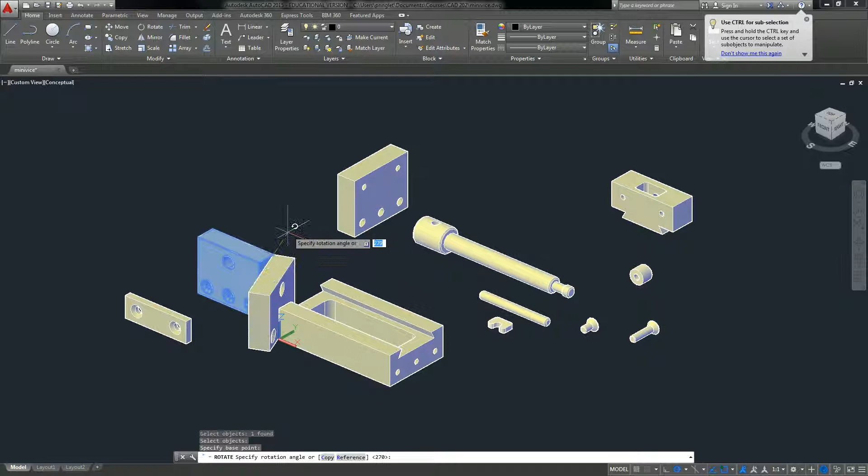First I'm going to rotate the pieces that need to be rotated. I know this is going on the back side, so I want that in that orientation. This object here needs to be rotated into this orientation. I can move this from this endpoint to this endpoint, and move this from this endpoint to this endpoint while I have them rotated. Now I've got those couple of pieces lined up.

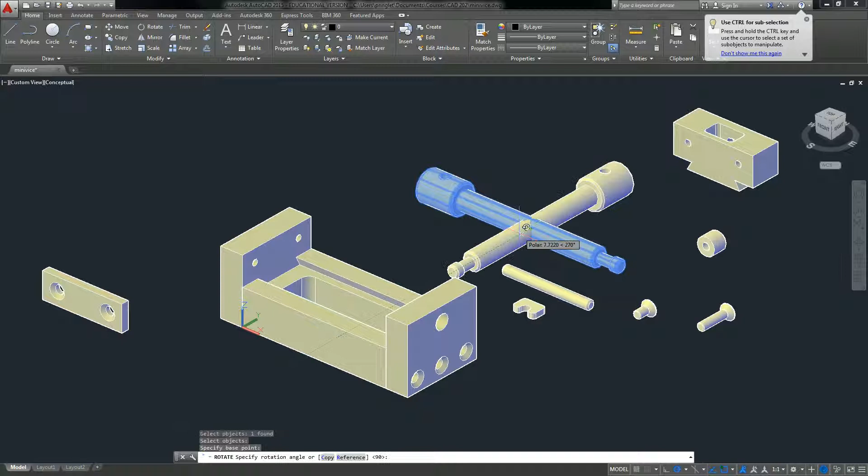I need to rotate this 180 degrees, so I'm just going to rotate that 180, and then move it from its geometric center point to the center point of this circle right here. That's going to locate it for me so I don't have to worry about putting it anywhere else.

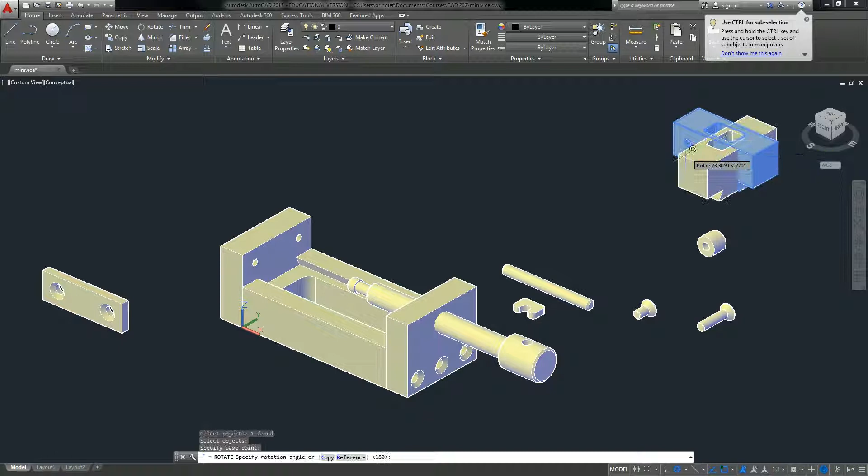Next I'm going to rotate this piece, only 90 degrees, and move it from the center point right here to the center point right here, and that's going to locate that. If I orbit this slightly I can see that's in the correct place.

Now I've got a couple of things to do where I've got multiples of some different pieces. First I'm going to rotate this piece here 90 degrees so it fits in with what I need, but then I'm going to mirror it so I have two facing the opposite direction.

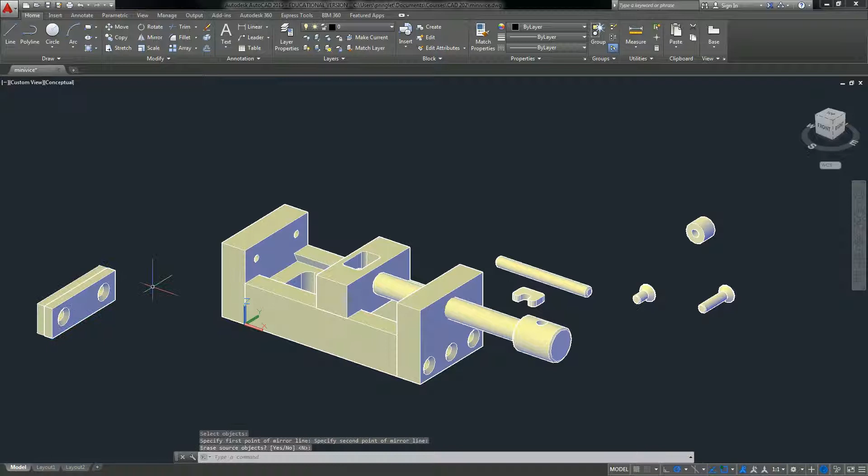Now I can move this one from this endpoint up to this endpoint, and I see I missed that endpoint, so I want to make sure I move it appropriately from there to there. It looks like I may be off on this one too, so let me zoom in and verify that's in the correct location.

One thing you don't want to do ever is start unioning any of these pieces together, because they are separate pieces. Now I've got all of those pieces in.

I'm going to need to rotate this thing first 90 degrees, and then go to a UCS front, and while I'm in here rotate this 90 degrees. Let me undo that so I know where it's going. So rotate that 90 degrees. I'm going to rotate this up 90 degrees. Okay, now that stuff there is in the proper orientation.

I'm going to move this from its geometric center point to the center over here, and it doesn't look like I'll be able to get a center over here. So I'm going to move it from its center point to the center point here. Looking at the dimensions, I can see it's 12.5 in, so now I'm going to move it an additional 12.5 to locate that in the correct place.

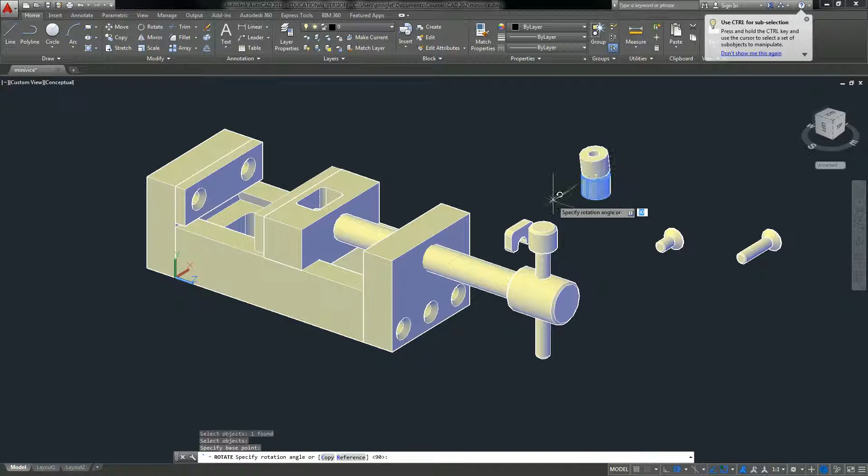We're going to rotate this one here 180 degrees and then move it from its internal center point to the bottommost center point on here. As you can see, I've got a lot of the stuff assembled already just by doing some simple rotation.

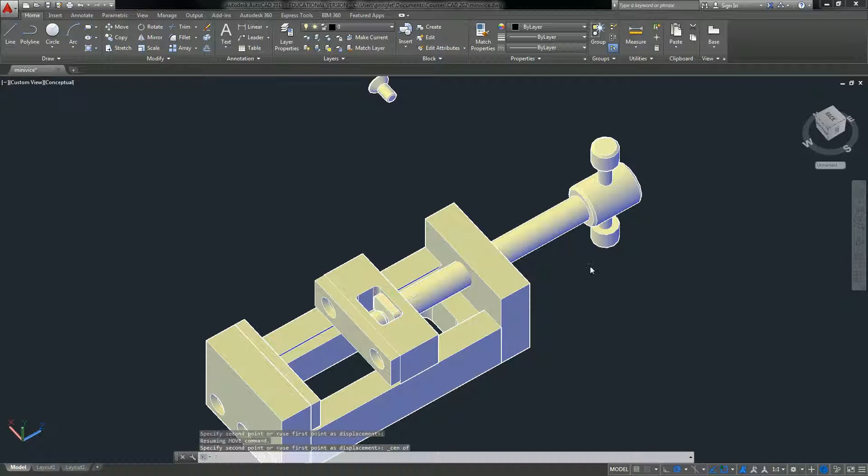Now I want to move this piece from its center point over here, and I'm going to have to orbit around to get the center point of this located in its correct location. Now the only thing I have left are the screws, so I'm going to go back to a world UCS because these things are going to be rotated along that direction. I'm going to start by first rotating this one.

Once I get it rotated, I'm going to move it onto my screen a little bit, and here I'll use a bit of a shortcut. Looking at the dimensions, these things are 19.5 apart. So I'm going to copy this over 19.5, and then copy the other one over 19.5 as well. So what I have is 3 screws that should be 19.5 millimeters apart.

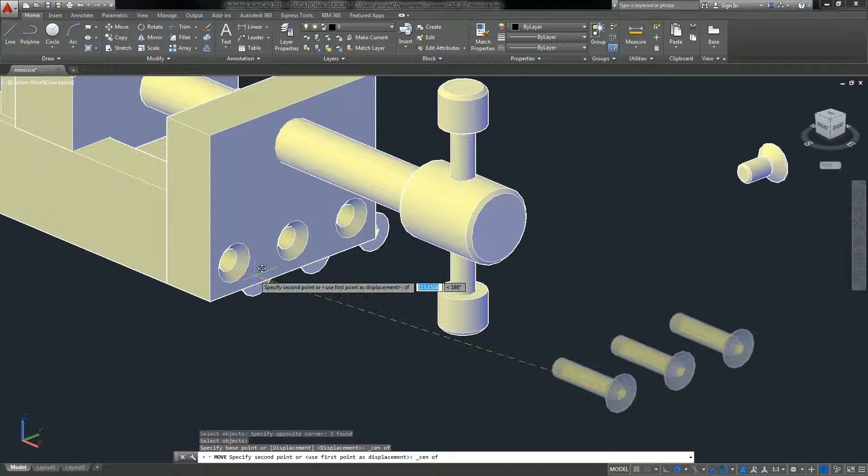Now I'm going to move them from the outermost center point here to the center point of the countersink. But instead of just grabbing one like I did there, I'm going to grab all 3 and just move them as a unit so they go into place.

There's a couple of different ways I could do this next step, and the way I'm going to do it is mirror this, this, and this around the midpoint of the whole thing. That should give me the 3 screws on the opposite side as well.

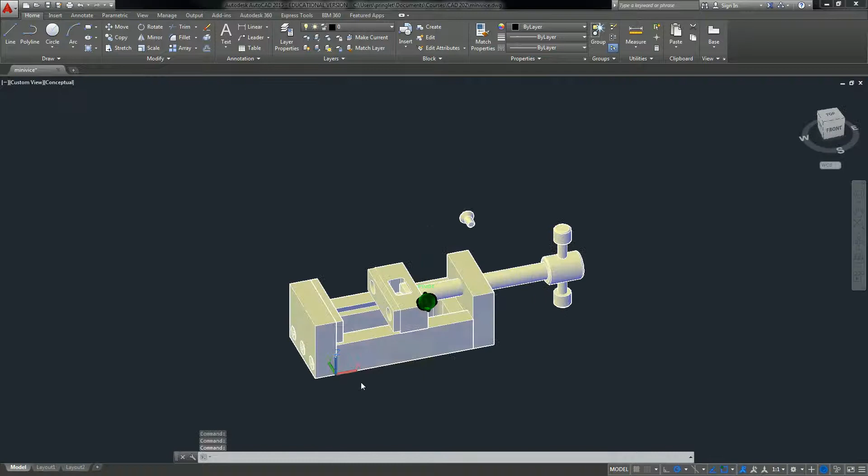Now I've got this screw, which is the only thing left to place, so I'm going to rotate this 90 degrees, and then looking at the drawing, these things are 35 apart, so I'm going to copy this over 35.

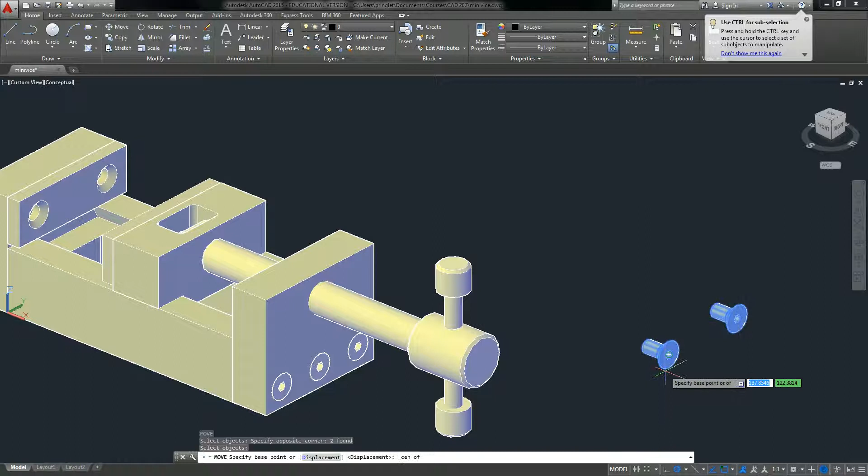And then I'm going to move these 2 from the center point of the outside to the center point of the countersink. Then I'm going to copy them over to here.

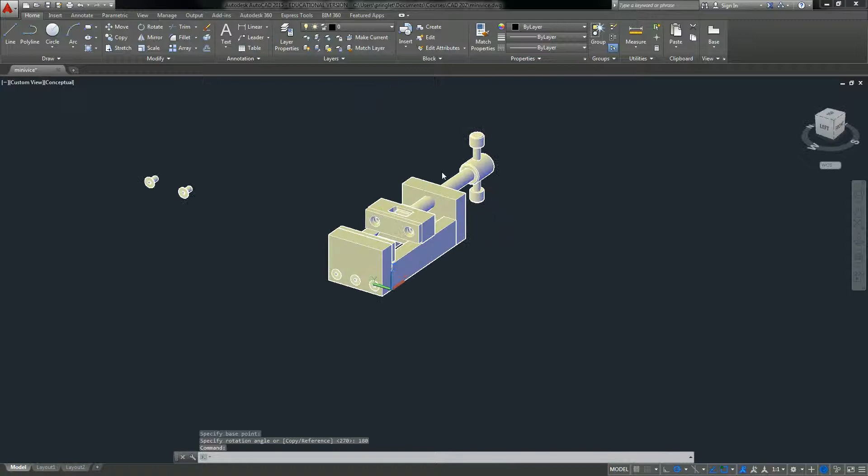Now everything I do from this moment, I want to do both of them at the same time. So the rotating of 180 degrees, as soon as I figure out where they went, I can go ahead and move those again from the outside center point here to the center point here.

So what I have now is everything in all the views that I need, and everything looks to be the way it's supposed to be. I do want to turn off perspective just because that can get a little confusing. And here you can see I've got the assembly model.

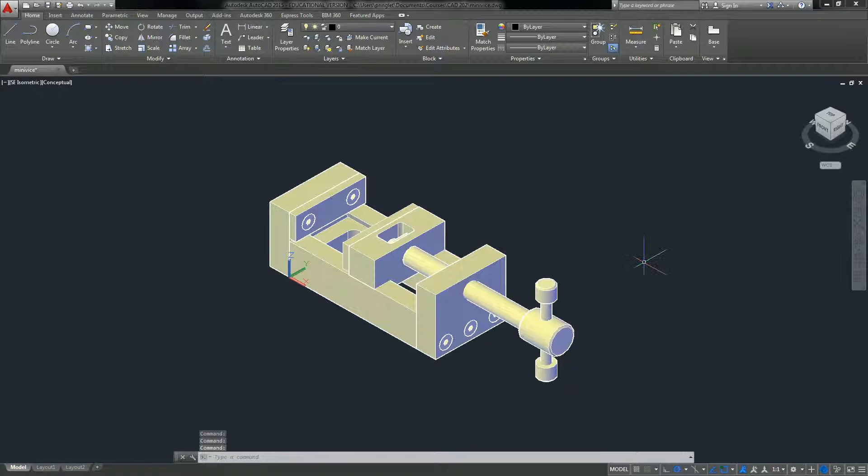Now, in addition to the assembly model, I've got to create a drawing of this assembly. So if I just go to base view from model space and select everything and hit enter, it's going to ask if I want to use an existing layout. I'm actually going to call this ASSY DWG, that way I know the tab I'm creating is my assembly drawing tab.

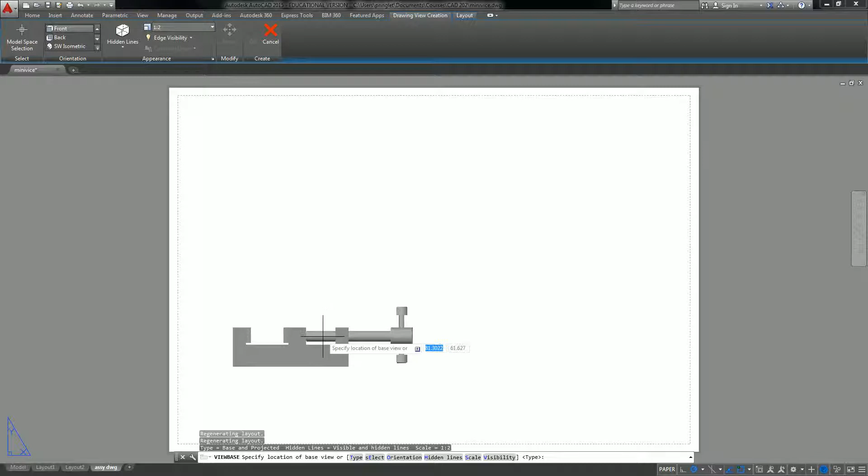Once I get it over here, I can place my front view, my top view, my right side view, and my isometric view, and hit enter. Now at this point I can go in and place the dimensions that are pertinent, like the overall length. The overall length from here to here is irrelevant because it does change, so you could put in there what the maximum is and stuff like that, but this satisfies the assembly model with some basic dimensioning.

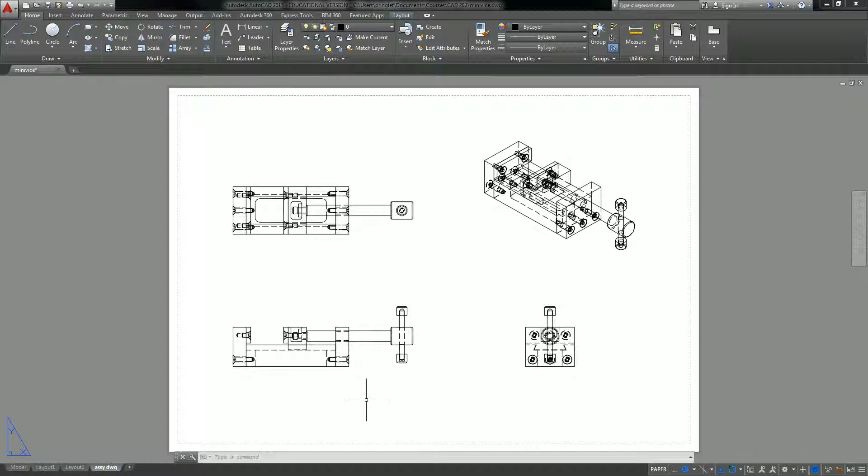And turn this to shaded with visible lines. That way it looks a little bit better. With some basic dimensioning, we can get this into being an actual assembly drawing. So we've got the assembly model, and for the assembly drawing, again, you may want to just add a couple of dimensions.

This thing right here, that's 130. Its overall height is 45. You may want to put in the distance between here and here, which is another 145. And then you can add other dimensions in here so that we can estimate how long this thing would actually be if it was fully extended or if it was brought in fully.

So if I were to give this an overall dimension now, from here to here, I would see that it's 202. But I also know that I can shrink that in by another 37, and that it can be expanded out by another 33. So it could be the 202 plus the 33 or minus the 37. In doing that, it gives me a good indication of how big this thing actually is.

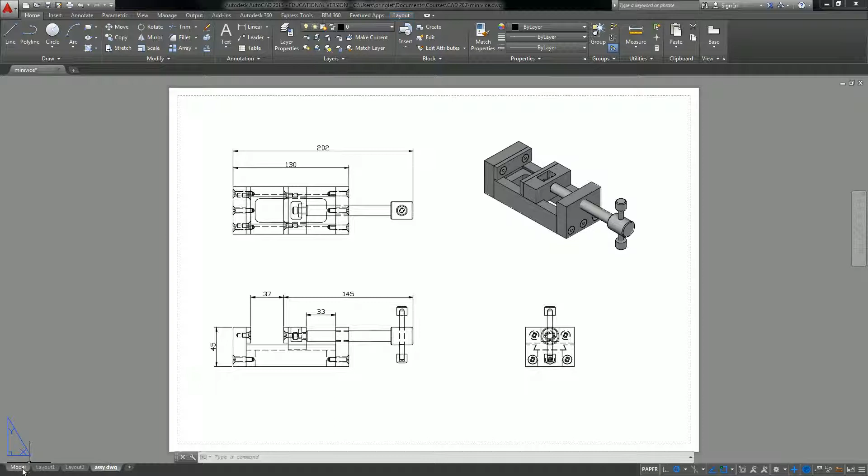So now, going back to detail views for each non-standard piece, if I go back to the model, I can go right back to base view from model space, and rather than selecting everything, let's say all I want to do is this piece right here, which is going to be my end plate. I can say enter, and for my layout name, I'm going to make end plate.

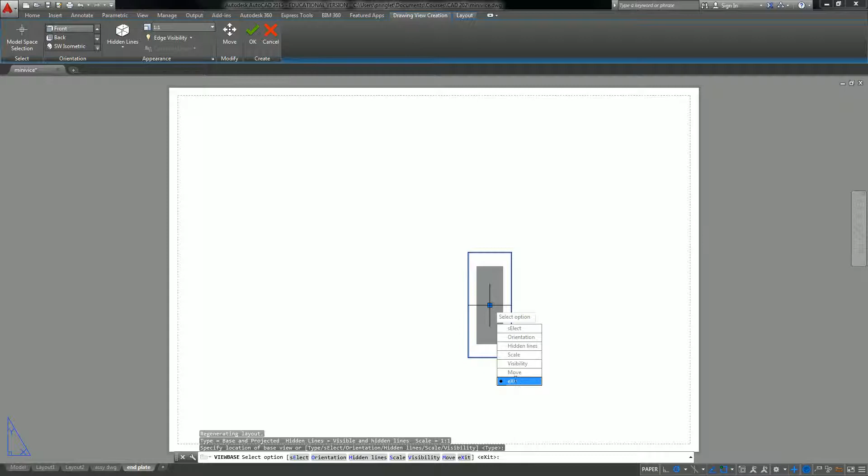Keeping in mind this is in the assembly view, everything is not going to look exactly the way you want. In fact, this is showing me the front view as the right side view because of the way it's oriented in the model. I'm okay with that. All I have to do is locate this, hit enter, and there I've got those two views.

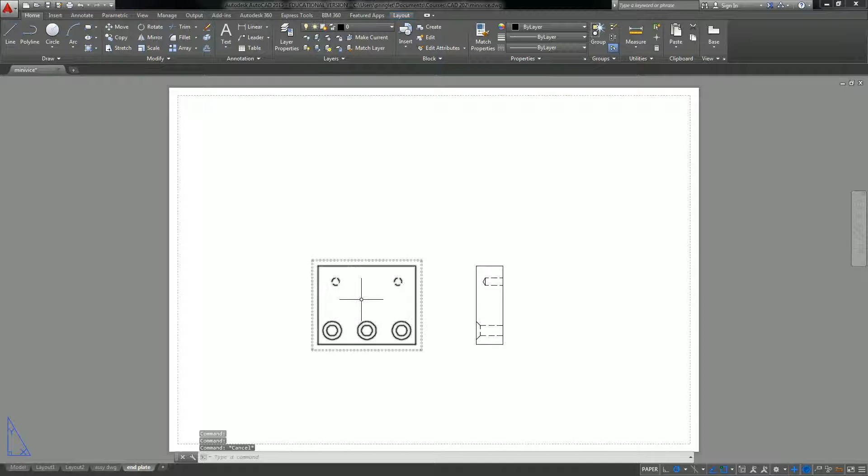Now, under base, I can come in here and create another view if I want. In this particular instance, these are really the only two views that I need, so I'm just going to go with these two. If I hit the drop down, I can change the scale. I may want to make this a little bigger, but I'll leave it from parent. I do want to click on this and do a projected view to show the isometric, just for consistency.

If I want, I can move these views so that I have a little bit more room on the screen.

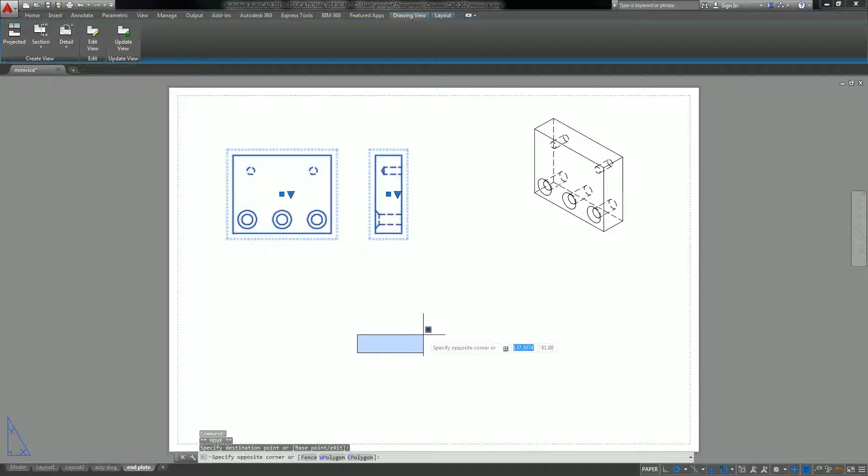At this point, I can add other pieces to this. I know I'm on the end plate, but I can come in here to base and say from model space—let me just go back to model because it's easier—and do base view. From model space, I may want to do the movable jaw as well. So I can hit enter, and if I hit down, it shows me the layout name I can use, and in this case I want to use end plate.

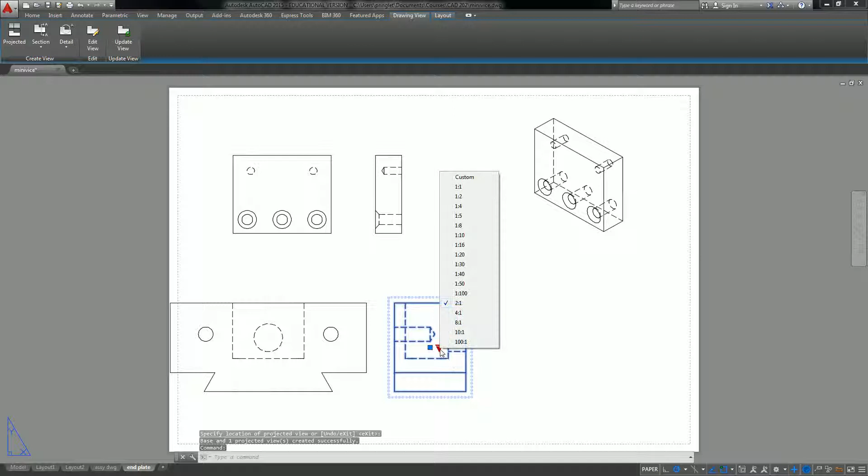Again, this is going to be in the right side view, so I want to click here, exit, and then bring this over. Now this is probably a little bigger than I would want, so I'm going to change the scale. Instead of being 2:1, I'm going to go to 1:1. That way I've got everything that I need. I can now relocate this so that I still have plenty of room on my sheet.

Now I want to come to this view and do a projected view from it to show the top view, and just for consistency, again with the isometric. I can now go in and begin detailing out all of these views.

The dimensions you're going to want to place are pretty much linked to the dimensions in the book. So it's a lot easier to get the information you need if you match up the dimensions in the book with the dimensions we have on the objects. Then you can pretty quickly go through and get all the dimensions you need. So that is going to be the detail views of the non-standard pieces.

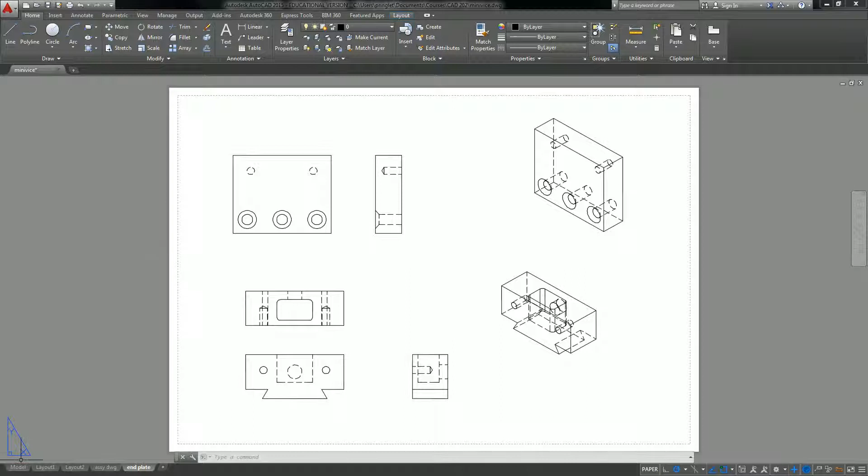The non-standard pieces in this particular exercise are everything but the nuts and bolts. The bolt that goes through here, the 6 of these and the 4 of these, those are the only standard parts. So those ones are not going to have to be modeled like the rest of them. The last thing we have is the exploded view, and this is going to be probably the trickier of the things you're going to do.

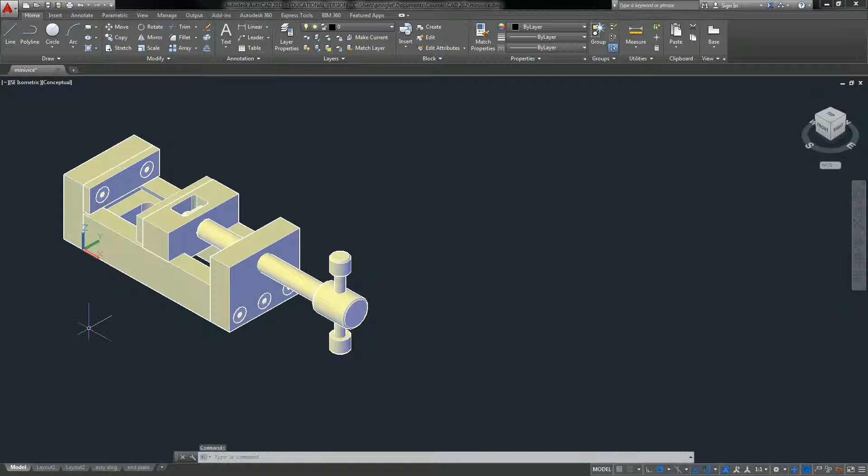The easiest way to start that is to first copy everything that you have over to the side. By copying this over to the side, you ensure that you're not damaging your assembly view at all.

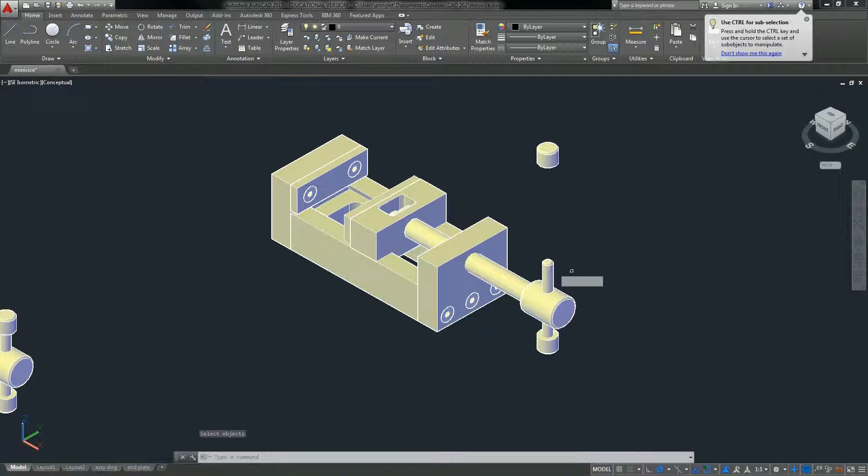Now at this point, I'm just going to move things based on the axis they were assembled under. So we'll move this up, and that shows the explosion of those pieces. Now I can take and move this retainer up, and then I can move all of this straight back so that it's out of my part. I can then take and move these three objects straight out.

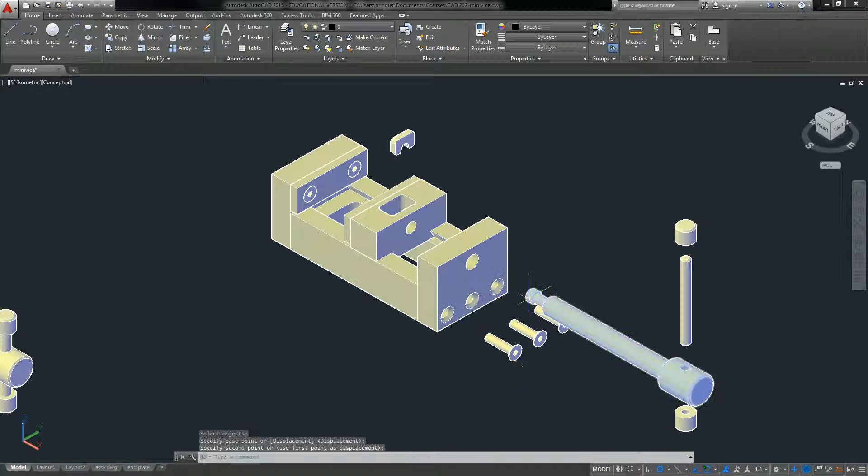For consistency purposes, I can move this up, or for clarity purposes, I can move it down. I could also move it back, but if you move this one back, keep in mind that this thing is going to spread out really far, really fast.

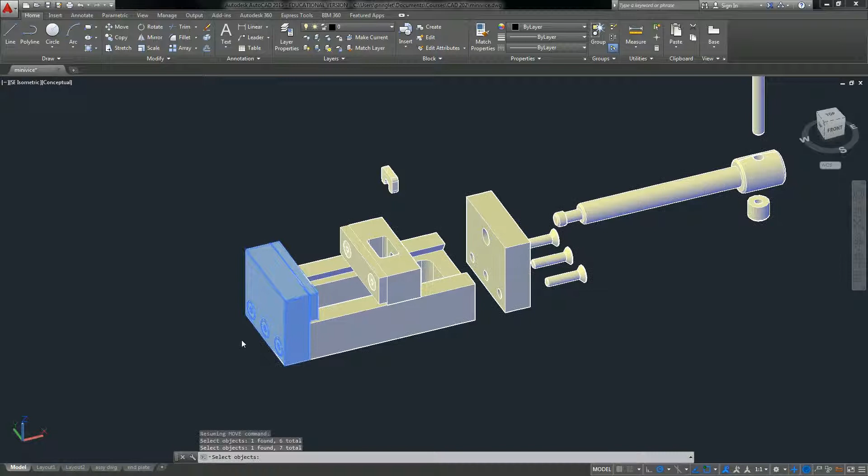So I now need to select this and all of this, in addition to those three screws that are holding this thing in place. So I'm going to try to grab those right here. And then I want to move all of that away from my object, making sure that I'm going along the path that I need to.

I can then move this, this, and this straight out the back. Moving this and this straight off the front of this piece now. And then moving this off the front as well.

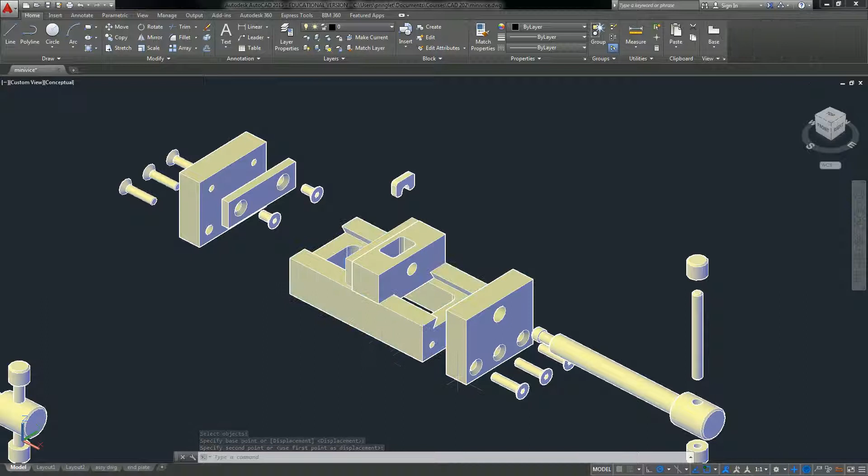Things may need to be adjusted as you go for greater movement and stuff, but you're starting to see the picture. Once you get this thing completely spread out and the way that you want it, you have a pretty good working exploded view, and the downside to that is it's going to be spread out pretty far.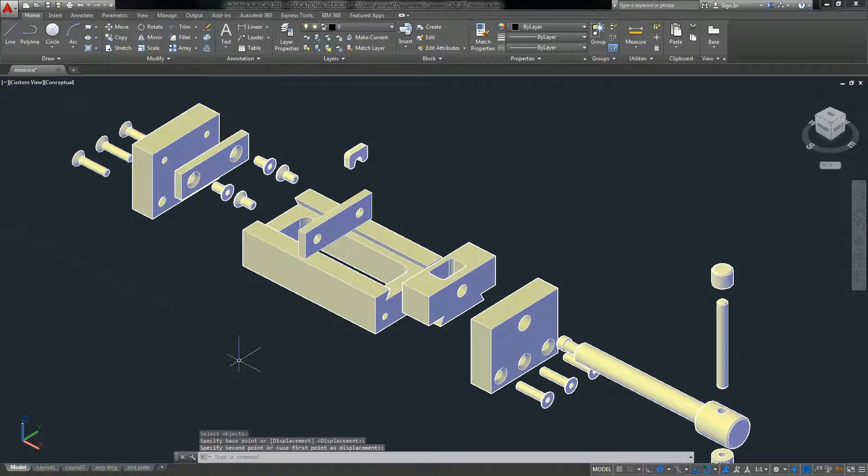At this point I can move this out, move these two pieces, and I'm going to move those, and they're nearly going to touch that. We'll move this back a little bit. This is really all done by just making it look good. You want a nice clear representation of how these pieces separate and where these pieces go.

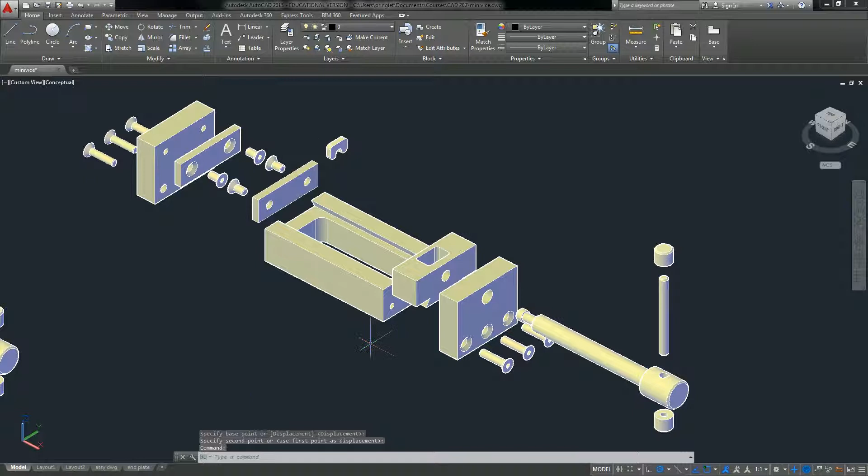Once you have something like this, and again you're going to need to play around with this a little bit, but once you have this completed, then you can go to base view from model space, and what I'm going to do now is I'm going to select everything in the exploded view, and the layout name that I want to use is going to be exploded.

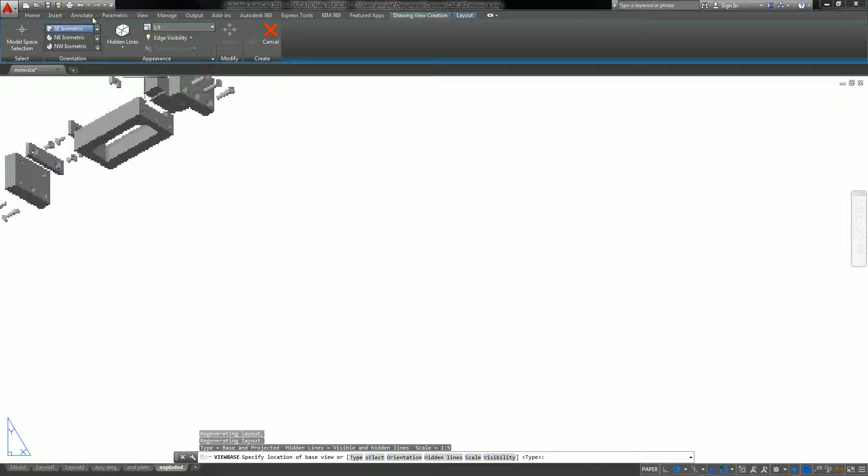So now in here I want to do a southeast ISO, because I think that may give me the best look for this. Actually, the northeast isometric in this case is going to give me the best look, and the scale that it's currently using is a 1:5, and I think I can go a little bit bigger, maybe 1:2.

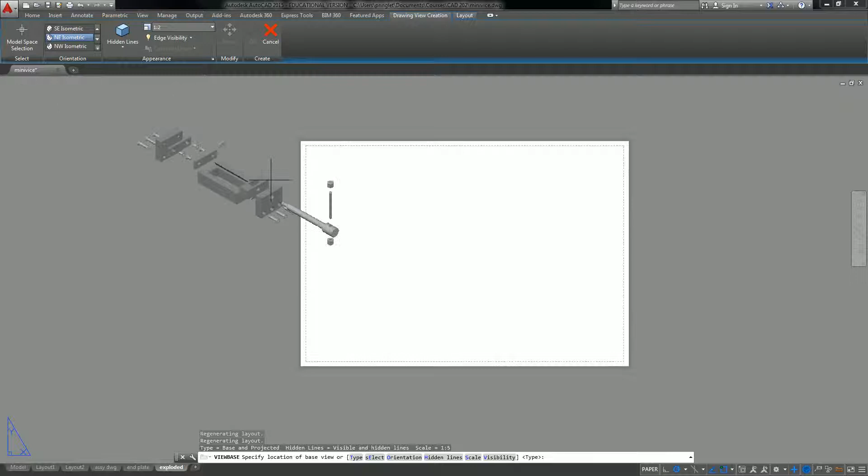1:2 shows me everything on the screen, so I don't want any hidden lines. I just want shaded with visible lines. I don't want anything clouding up this. Edge visibility, I don't even need to have tangent edges on or anything else like that. I just want to make sure that everything is very, very clear and easy to see.

And I'm going to place this up here in the corner, and then exit, and there's my view. So now I've got my exploded view.

I can then go to the Annotate tab and insert a table and go ahead and fill out the list of material. You're going to use the same part numbers that are in the book. So 1 is going to be your base, 2 is your drive screw, 3 is your end plate, 4 is your slider, 5 is your holder plate, and so forth and so on.

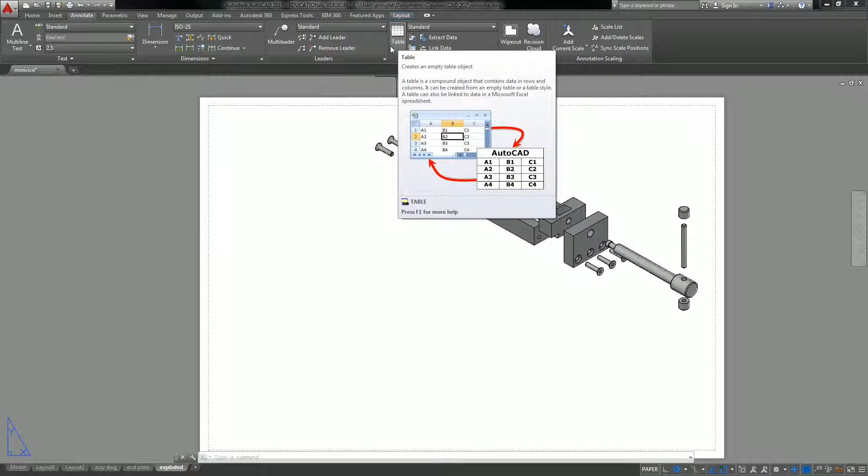And then you're going to label those pieces on here in the list of material. So your list of material is only going to be 3 columns, but it's going to be 11 items. So you've got a 3x11, and once you add the header row, that makes it a 3x12. The only things that you need is item number, name, and quantity, and from there you'll be able to type out your list of material with everything else.

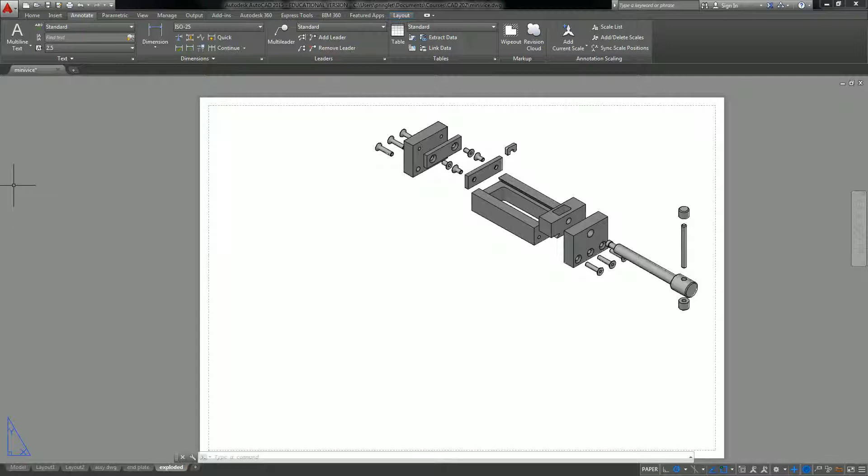You can add a 4th column if you want for the material, since it's given to you in everything. But that shows, this tutorial covers now how to do the assembly, how to do the drawing, the detail views for all non-standard pieces, and then the exploded view.

But again, make sure that you separate your exploded view from your assembly view, because if I start moving stuff around on here, it's going to change my assembly drawing, and I don't want to change my assembly drawing at all.

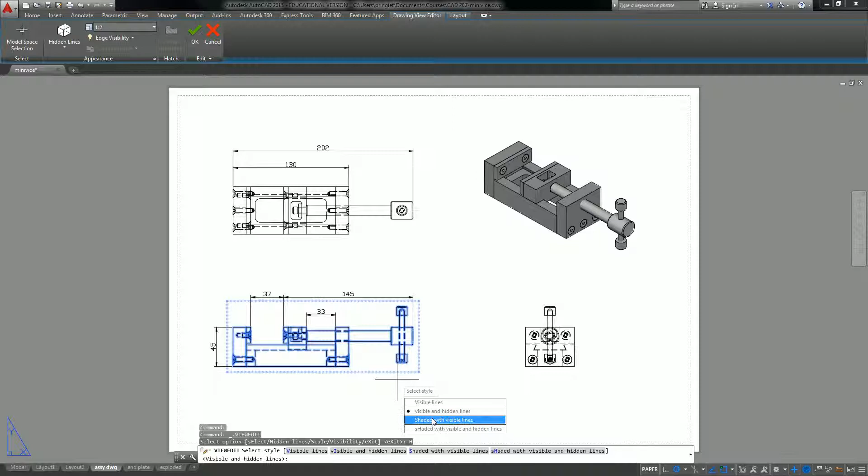I do want to turn off hidden lines in this, because the hidden lines definitely make this thing a lot harder to see and harder to understand.